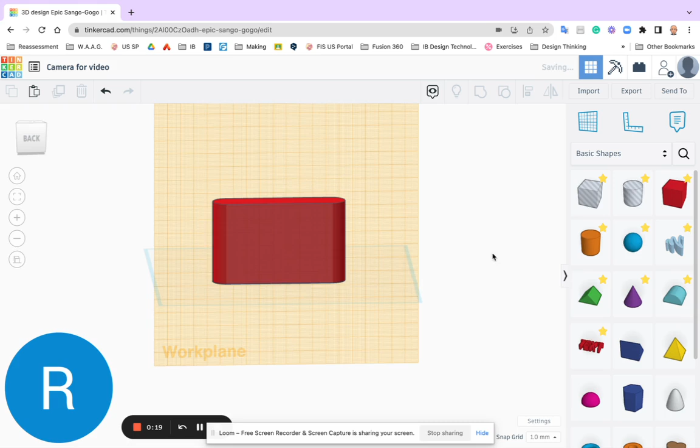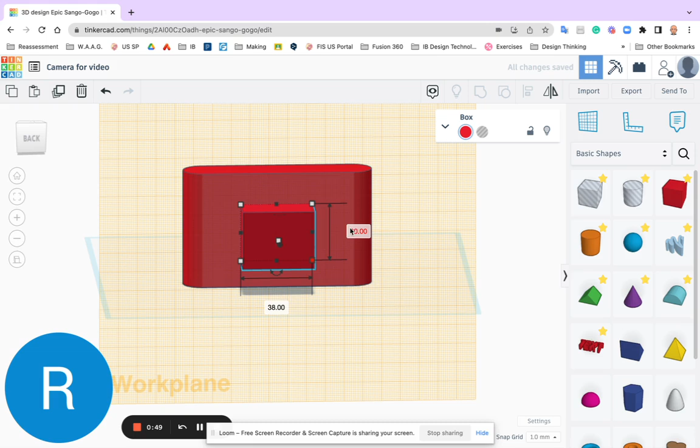What we're going to do now is put the work plane on there. Click on the work plane, put it on the back, and then we're going to bring in a rectangle. I'd like this to be a rectangle, 30 by 38, and I want the height just to be 1 millimeter. Click on the number, make it 1 millimeter. That's going to be the display on the back.

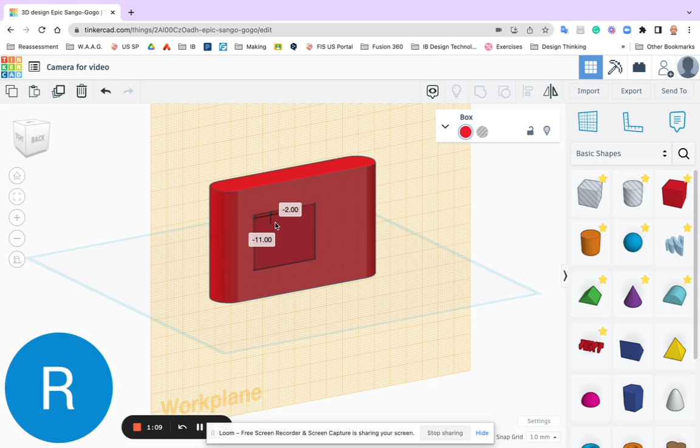We need some controls for the display though, because this is an old camera. We don't have touchscreen technology on this one yet. So what I'm going to do is use the ring function. I'm going to bring that in, pop it down there, change the sizes, make that 10, and I'm going to make that 2.

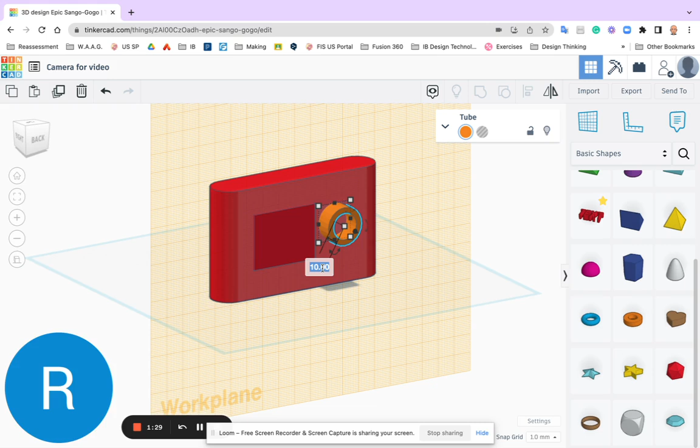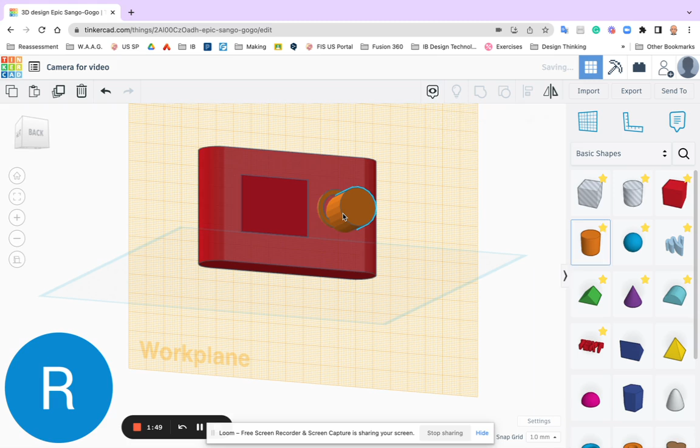And what I want to see, I'm going to bring in another cylinder, pop that on there. I'm going to change this size to 5. Press tab on your keyboard to get the other number, make that 5 as well. And then change the height here to 2.

And then I want to select the ring and the cylinder, and I'm going to align them. Oh, I didn't get both of them. Actually, you know what? Let's forget about that small cylinder. Just going to delete that just now, and we're going to bring that in later.

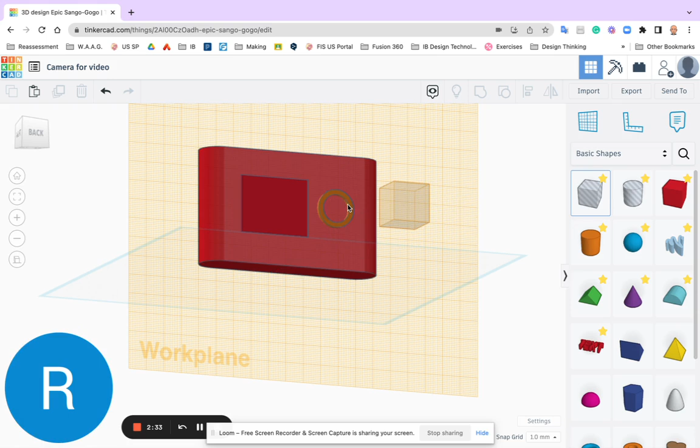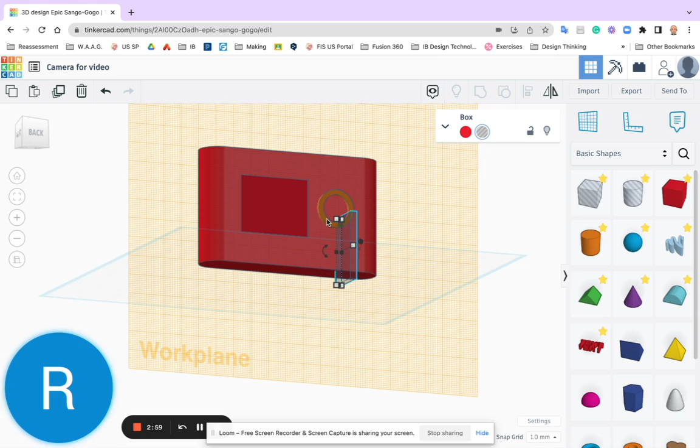What I wanted to do was divide this up so that it becomes buttons. So I'm going to bring in a hole cube. I'm going to click on the numbers and change that size there to 3. Enter. And I'm going to increase that length to 35. I'm going to take that, hold down Shift and click on the ring, and align them so that it's in the middle of the circle.

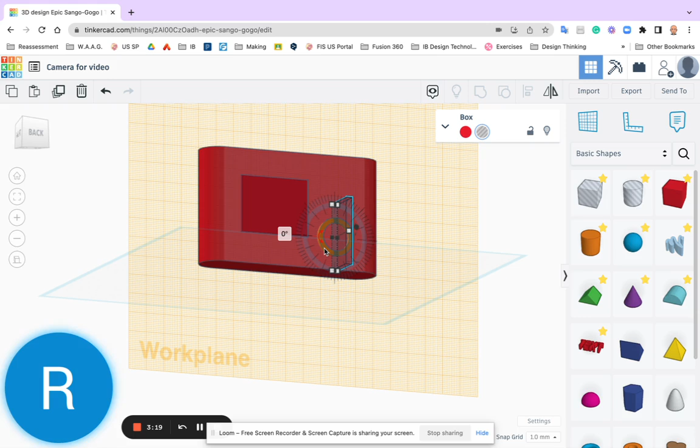What we can do just now, if it makes it easier for you, is take both of them. I'm going to click Shift to hold them both, and drag them over to here so we can see what we're doing. I'm going to click on the back of my cube there so I'm looking straight on to it. Oops, zoomed in too far.

What I want to do is take that hole and duplicate it. Go up here to duplicate, and then take one copy. So there should be 2, one on top of the other there. I'm going to click on that, take it round, and type in here 90 degrees. Whoops, things aren't working out right now. Click on it, drag it by the handle round to 90 degrees.

Now what we're going to do is drag a box around both of them, and group that together. You can see now we've got 4 buttons.

I'm then going to bring in another cylinder. And I know I said 5 before, let's see what 10 looks like though. So make it 10, tab on your keyboard, 10, enter. And then I'm just going to drag a box around both of these again and group that together. And I'm going to hit the middle and the middle there. I think that looks quite good.

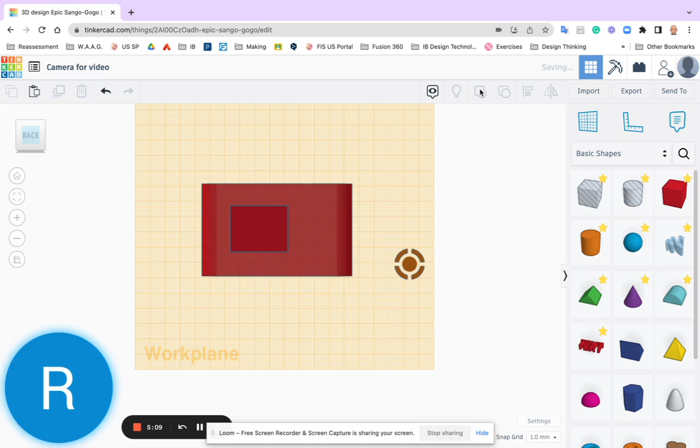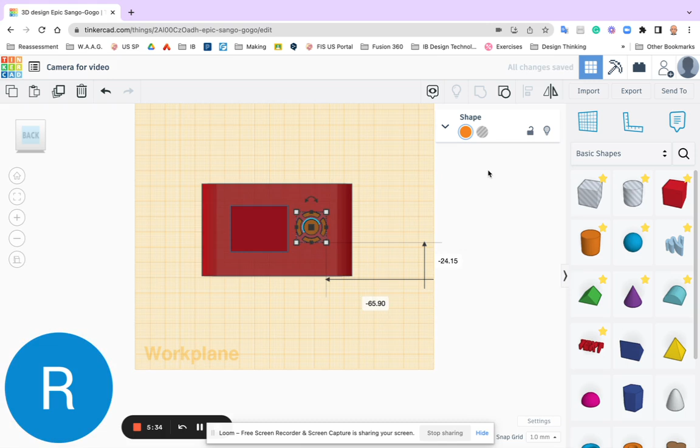What I'm going to do nearly last, is group that together. But if this was a control, you can see those are buttons. If those were buttons, I'd really want it rotated round 45 degrees, because then we've got up, down, left, and right. Now, making sure I don't grab any of the handles, I can take that over, and we've got our display and controls finished.

Oh, no, we've not, because I forgot about the height of that. So to fix that, I'm just going to undo that group. I'm going to click on that height there and make this 2 as well.

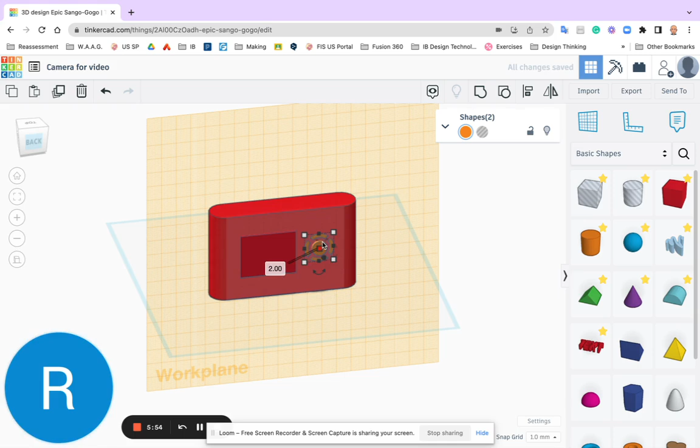Then I can hold down Shift to select the rest of the buttons, and I'm just going to group that again. You can see now that, oh, it's sticking out too much. Oh dear, right, I've got to fix that.

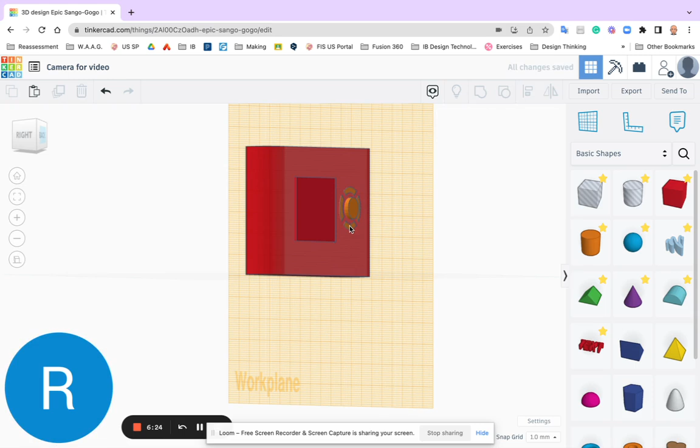So I'm going to ungroup that, and maybe that one. How high did I have that? Oh, 0.2, that should be 2. Silly me, okay.

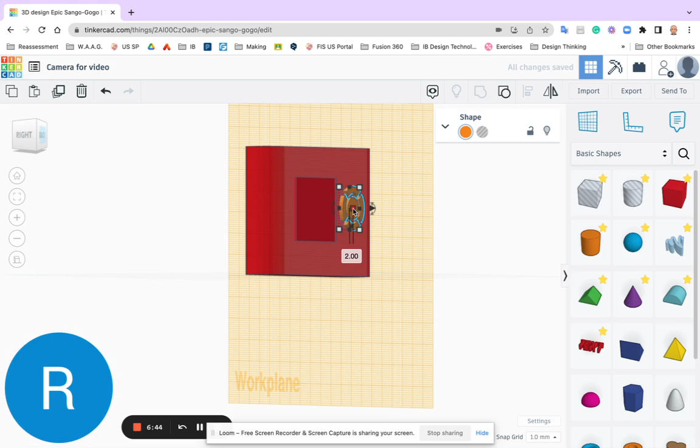So I'm just going to group them together by selecting both, holding down Shift, and then using the group button. Actually, 2 is quite high, I'll maybe just make them 1 all together. And you can make it how you like. Okay? There we go. We got our buttons on the back of the display.